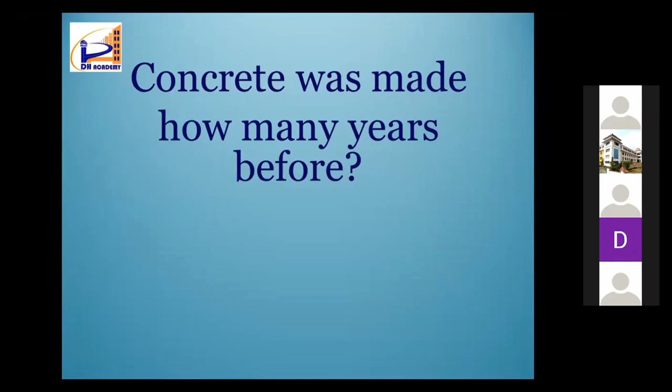Concrete was made how many years before? It's a very interesting question. Generally I get so many answers, but the more appropriate answer is it's more than 9,000 years before. And it is found in many places like Israel, Rome, etc. What I am trying to do here is just like ice breaking.

For 5 minutes, we will be discussing some past structures. You can see some samples of concrete floors which were constructed in 7,000 BC.

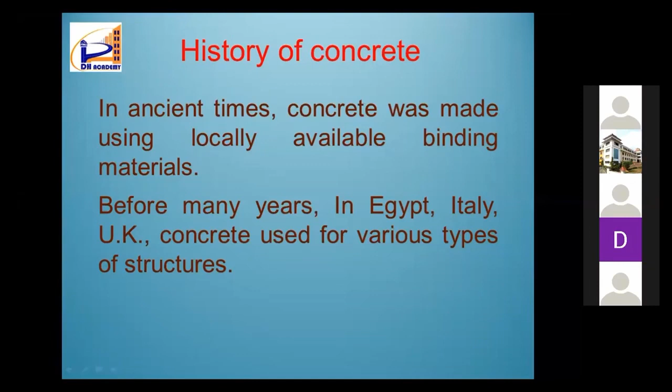Now, history of concrete, as we all know, that concrete was made with locally available material at that time. In India also, there are many old examples. Honestly, those structures, durability-wise, are still surviving and the durability is better. So concrete was made around 9,000 years before.

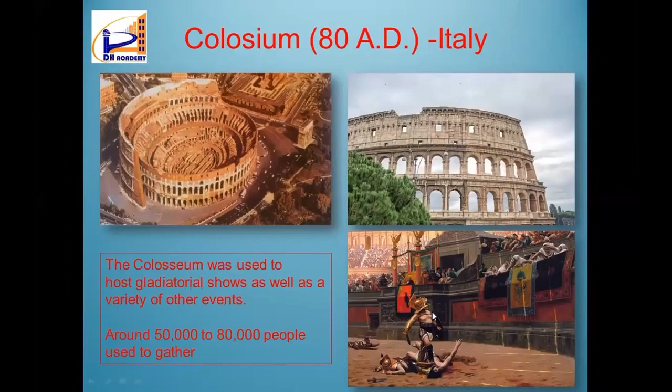Again from Italy, the Colosseum. Colosseum means it's a type of stadium used to host gladiatorial shows as well as a variety of other programs, with a capacity of around 50,000 to 80,000. Now they are actually planning to repair it, but at present it is not working.

And again, it is a tunnel, the Thames tunnel. It is supposed to be the first tunnel built. At that time, the new technology they applied is called tunneling shield technology. You can see a picture from 2010, still there. The year constructed is supposed to be 1843.

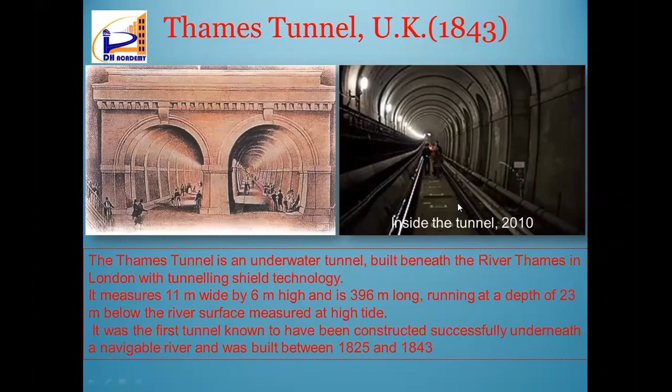And again, from here we all know they are doing some load test. So they are applying a load test, and interestingly, the person sitting inside is the owner, the Hume pipe manufacturer. He wanted to prove that his pipe can withstand a load of 21 metric tons.

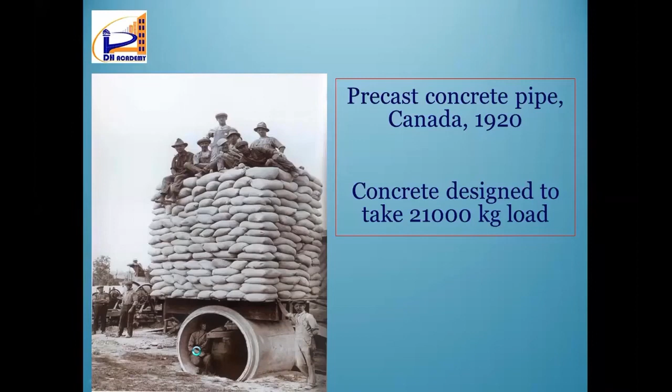Nowadays these Hume pipes are very, very popular, and now Central PWD and all departments allow them. Suppose we are constructing a culvert, we know it's a tedious process, we have to close traffic, everything. Now, if you use this type of Hume pipe, within 2 or 3 days you can construct that culvert. It is now slowly gaining popularity.

And this is also just for fun, I have introduced this slide. Hammurabi was a king of the Mesopotamian civilization. And now we are supposed to follow certain rules, building codes, building rules, everything is there.

So he was the first person who introduced these laws. He used to inscribe them in stones.

The first law: if a building collapses and no one is killed, the builder shall rebuild it without cost to the owner. Okay, that's not a big deal.

The second one, a little more dangerous: if a building collapses and the owner is killed, the builder shall lose his life.

The third one is very critical and dangerous: if a building collapses and the wife of the owner is killed, the builder shall supply him with a wife of similar value.

So this was the first law, and I have taken this from a presentation of Dr. Ramakrishnan, and there are so many other laws also.

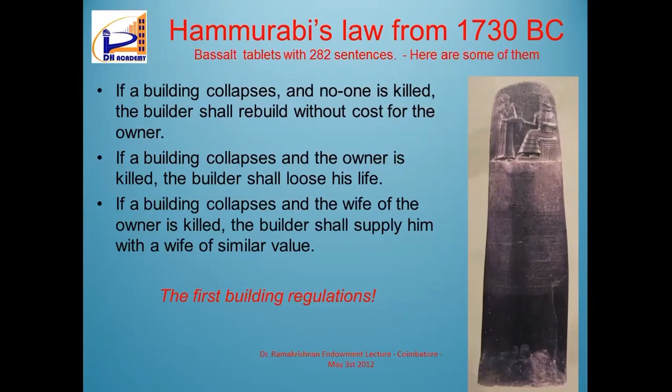Now coming to our situation, as we all know, the most consumed item in the world is water. Next to water by weight is concrete. Concrete is a man-made material, and it is in the number 2 position.

So there are so many advantages for concrete, but we are not going into details of that. If something has to reach second position, it has to have some very good properties or advantages. So let us examine why concrete reaches there - the advantages of concrete.

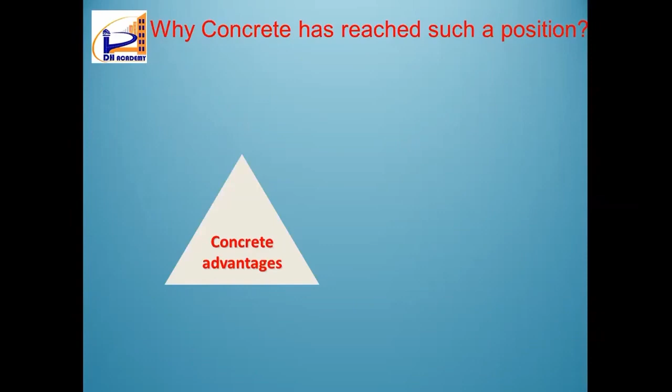Nowadays so many presentations are going on about sustainability. In sustainability there are mainly 3 pillars: economic aspects, environmental aspects, and social aspects. If we have a balance between these three, then we can call it a sustainable structure. Concrete, cost-wise, compared to all other construction materials, is the cheapest.

Then durability - if designed properly, concrete is durable, and its service life can be increased. But because of so many reasons, nowadays the average life of our structures - I'm talking about individual houses, not major mega projects - has decreased to maybe around 30 or 40 years maximum, and we have to do regular repairs. So durability is also one of the main advantages of concrete.

Then the other one, aesthetics. Concrete can be molded to any shape - we design the formwork, and over that formwork we place concrete. So it can be molded to any shape without any additional wastage.

Suppose you want to make an arch with wood - very expensive. If you want a teak wood arch without joints, you have to cut that much wood and take out the arch portion, and the rest will be waste. But in case of concrete, we design the formwork and place concrete over it, so there is no wastage for concrete at all.

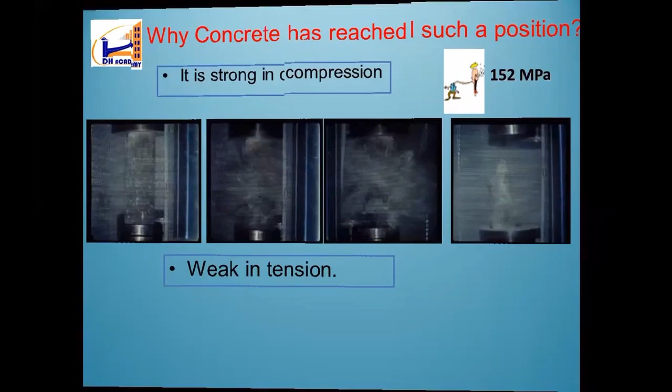Next, concrete will gain strength with time. And this is a very interesting slide, which I think most of the participants, being students, will find very useful, because I'm comparing concrete here.

When concrete is at 20% strength, it's like a baby 1 or 2 years old. If concrete reaches 70% growth, what happens? Without any support, the baby can stand. That means the concrete can withstand itself.

So of course somebody is asking you, when can I do my de-shuttering? You can immediately answer that when your concrete reaches 70% of its strength, then you can remove the shuttering, and it can withstand its self load.

And on attaining 100% strength, what is happening? Concrete can take additional loads also.

Now, another interesting question, mostly for students: why are we considering 28 days for compressive strength? What is the specialty of the 28th day? Actually, 28-day concrete is supposed to reach around 95 to 99% of its strength. That is the reason why it is taken as 28-day strength.

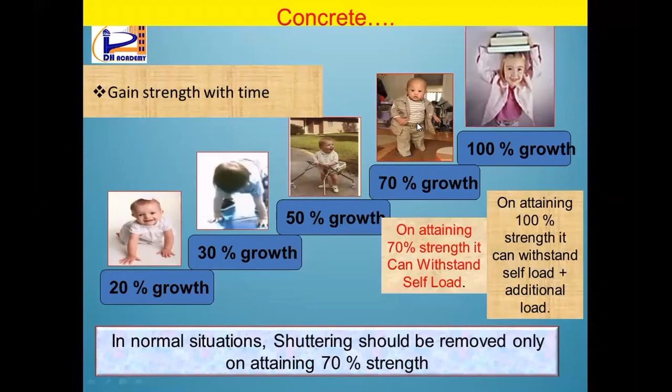Now, concrete can be a durable, environment-friendly material, and you can build some interesting structures. If somebody asks you about the tallest building, you can say Burj Dubai, which is plus 800 meters. Taipei is plus 509 meters, and Petronas Tower is 450 meters. And even some offshore structures go to minus 350 meters.

Can you imagine any other material being constructed below the sea level, at minus 350 meters? It is very difficult, and practically not possible at all. But with concrete, we can achieve that.

And one more interesting thing: the tallest residential building in the world—I'm underlining residential building—is coming up in India. The name of that building is World One. It is around half a kilometer, around 450 to 500 meters high, and it is purely residential. Right now around 60 to 70% of the work is over. Once World One is completed, that building will be the tallest residential building in the world.

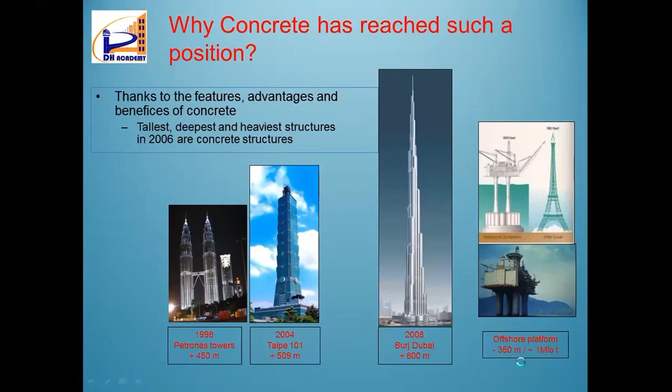Now, we discussed so many advantages of concrete, but concrete is not always performing well. Nowadays it's very rare, but maybe 6 or 8 months back, whenever you read the newspaper, you'd see a building collapse, and all of those were RCC buildings. So we talk about the advantages, but the building is not lasting.

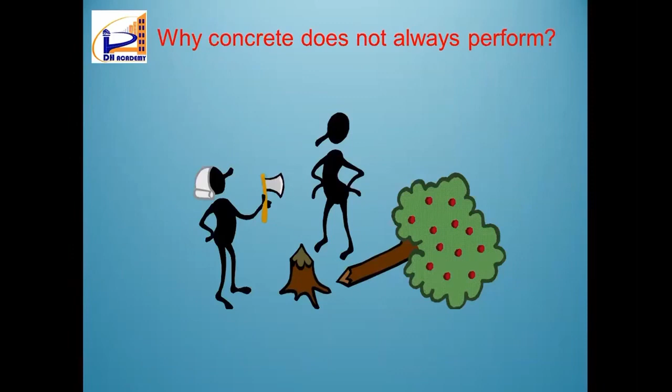So why? There are so many reasons affecting durability. Since we are talking about concrete, we will discuss what concrete contributes to that. Even being the most used universal construction material, concrete is still unknown, and its technology is not well mastered.

For students, I will say we will discuss concrete mix design. So if you ask me whether concrete mix design is a science or an art, I will say it is more towards the art side. I'll give some examples to explain that, because there is a basic science behind it, and the more trials you do, the more information you gain, and you can make good concrete.

That is like practicing Bharatanatyam—it's an art. The more you practice Bharatanatyam, the more you become an expert. So my request will be: theory is theory, but what we have to do is more and more trials.

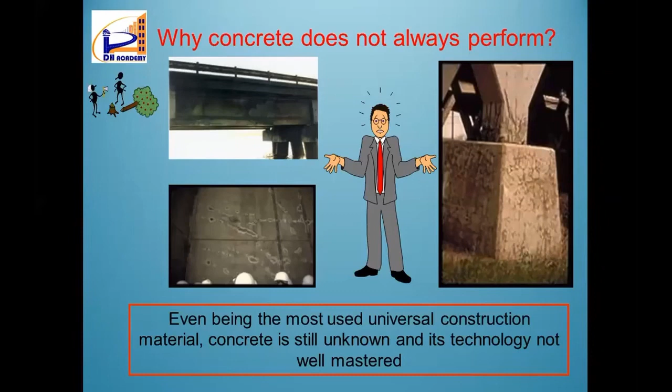Nowadays there is a tendency that we give some materials to someone and ask them to do a mix design. They will just do one trial and give us a mix design. That is actually wrong. We have to have a series of trials and take the average of that. Only that will work, because one time we may get a certain result, but another time a difference in atmospheric conditions will also affect it. So this is very important and key.

Concrete, as I explained, concrete technology is very simple, but many people abuse concrete often out of ignorance. They will say this concrete is not working, this concrete is not good, the durability is not there, cracks are coming, so many problems. According to me, the main villain is that we are not able to control the water cement ratio in the concrete, and we are reluctant to use admixtures—chemical admixtures and mineral components. Basically, chemical admixtures and mineral components are very, very key for making good quality concrete.

And generally there is a tendency—I hope there are some practicing engineers also attending this session.

For them, we are all good people. Those who are not attending this session - some people will not attend the two main stages of concrete, that is placing and curing. Because while placing, if you go near the concrete, our good shirt or pant will get some stains from it. And regarding curing, generally there is a tendency that after finishing, most engineers will say, sir, concrete finished. But for a civil engineer, if we have to say concrete is finished, we have to complete curing also. That is the importance of curing.

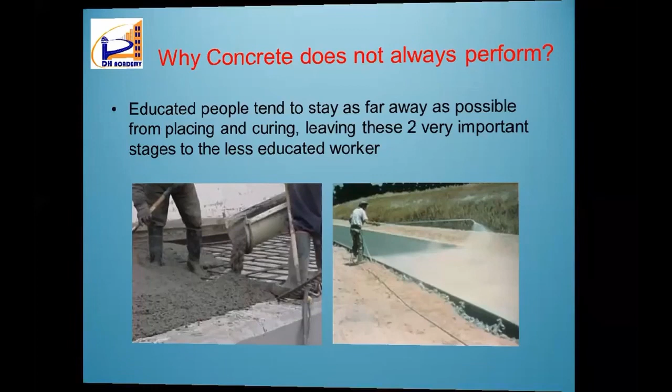So these are some of the reasons why concrete is deteriorating. These are the main reasons. And we have technical know-how available, but the technical know-how used by us is very less. It is in books, it's in theory. We are not ready to apply it.

One example is the usage of chemical and mineral admixtures. Some government departments are still specifying ordinary Portland cement. If you consider the durability aspect of concrete - last time at the ICI Cochin chapter program, Dr. Manu Santhanam from IIT Madras was telling us that blended cement is good from a durability point of view. So we are not applying that part.

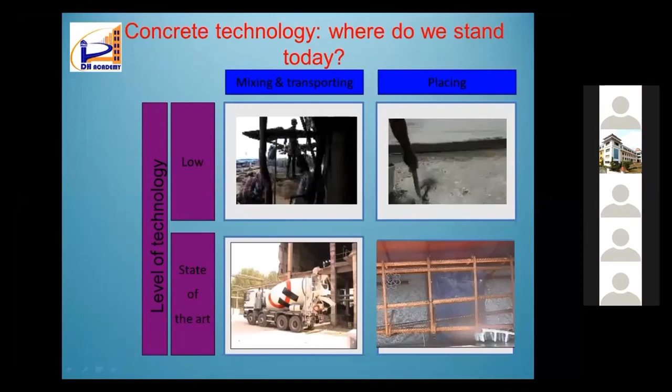Now, latest - you can see the state of art mixing. We have batching plants, we have very good batching plants, very controlled concrete we will get. And in placing, now this is a concrete - this is self compacting concrete happening. You see concrete is just pouring, flowing like water. It is not because of additional amount of water, it is because of the special design and presence of some special admixtures like PCE based admixtures. So we have state of the art technology, but we have very low level of technology being applied now.

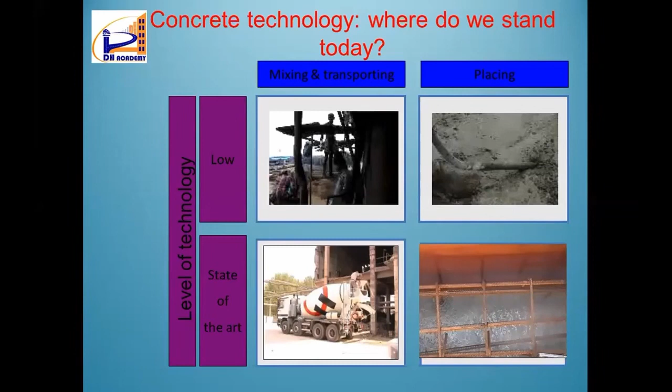So these are the gaps. This is the reason why our concrete is not always performing, though it has got enough good qualities. Sometimes people are not making it in a proper way. So in the present concrete scenario, what I am trying to give you is some information about the do's and don'ts, the wrong practices and the new practices. I told you it's a very lengthy topic - if we want to cover that, I require a minimum of 3 hours. So I am trying to compress it.

Now, the main idea of this discussion - if somebody can suggest something after this session - the question is, could we make a new generation of concrete structures which would be much stronger and much more durable? Can we make that concrete? That is the question in front of us.

Arogyam means no rogam, a state without disease. But suppose I don't have any diseases right now, but by birth I don't have my right hand - will you call me a healthy man? No. So there are two parts to call a person healthy: number one, no diseases; number two, all the organs should be there, in correct position and in working condition. Otherwise we will not call him a healthy person.

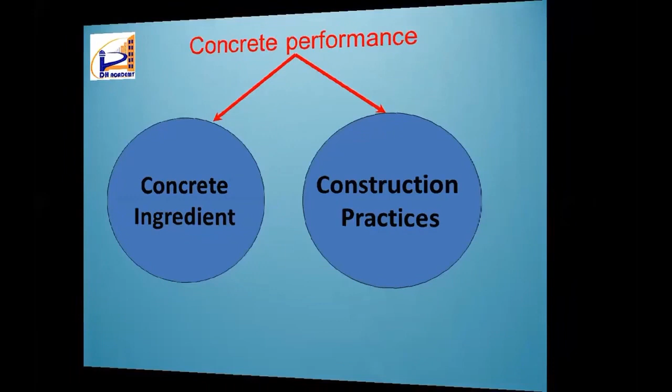Now, concrete is actually a family of materials. It is not like our modern family. In a modern family, what is happening? We are becoming like a nuclear family - me, my wife, and my child, that's only. Earlier the concept was not like that, it was a bigger family, and that is the reason why nowadays the divorce rate is also high. If there is any issue between husband and wife, they directly go to court and file, and the court may or may not allow them to live together - it is up to them.

But earlier, if there was a small issue, they would go to the grandmother or somebody like that. The grandmother would say, 'Your husband only did this much with you? Your grandfather, oh, he did much worse.' So we are happy - okay, she also suffered, I am suffering a little bit, I am happy now. It is just like concrete is also a family of materials.

The difference between a human family and the concrete family is that the concrete family is expanding day by day. Earlier concrete was just cement, aggregates and water - the basic three components. Now mineral admixtures came, chemical admixtures came, and there are combinations of chemical admixtures, combinations of mineral admixtures, combinations of aggregates - all of that came in.

So this concrete family is expanding, and we used to call cement the head of the family because he is holding the family together - that means cement is binding everything. Chemical admixtures are just like the daughter-in-law. We have to select very carefully because it may have compatibility issues with cement, so we have to do a compatibility check before finalizing a chemical admixture.

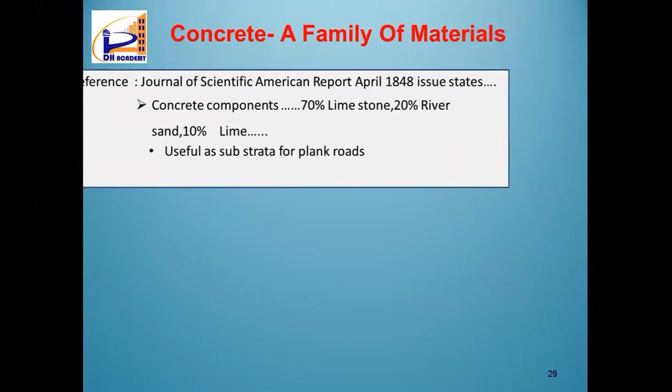So that is the role of water, which is very important and crucial. And as I told you, you can see the family members. Earlier, the concept was in 1848 and all.

Some road work and substrata work used concrete then. The combination was 70% limestone and river sand, etc. Now, modern concrete has so many materials added, and only then are we making our modern concrete.

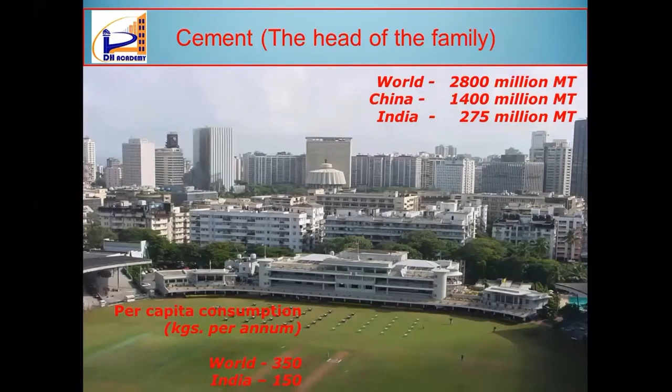Now, as I told, cement is the head of the family. In world statistics, I am not going, since we are a little bit short of time. And cement, I'll just discuss the basic things. Whenever we are discussing with students, we used to ask, who invented cement?

So that was the question. But generally they will tell us the father of cement. So we can say the father of cement is Joseph Aspdin. He invented cement between 1824 and 1828.

Now actually speaking, cement quality has increased, and the basic cement raw materials are calcium oxide, aluminum oxide, silica oxide, iron oxide. So from lime, clay and sand, hematite, we are getting all these materials.

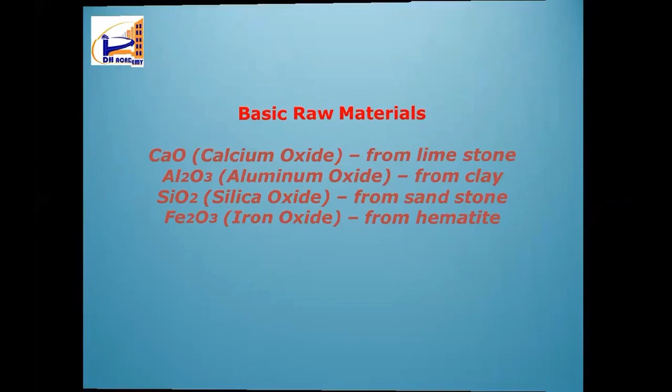Manufacturing process, time is not there, so we are not going into it. And this is called the Bogue components, right? C3S - alite, belite, celite and ferrite. We can say this.

C3S is more in concrete, and it is mainly responsible for early strength and strength at all stages, right? But the problem is higher heat generation.

C2S means belite. It is 15 to 30 percentage. Only at the later stage will it contribute.

C3A, tricalcium aluminate - it is also very less in quantity, but the reaction is very fast. C3A will react very fast, and the heat generated is very, very high. We can say it is the most in concrete after hydration.

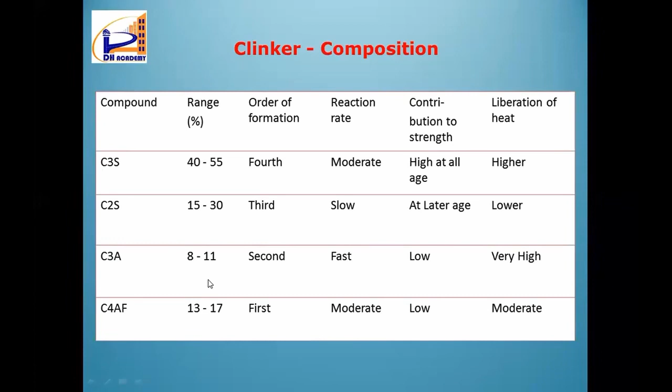And C4AF, tetracalcium aluminoferrite - it is moderate, heat generation is moderate. And because of this tetracalcium aluminoferrite, we are getting cement's gray color, right? Because of the presence of that.

And ordinary Portland cement, now IS code - IS 269, only for this 33, 43 and 53. Then PPC, then slag cement, rapid hardening cement, and there are so many other cements available in the market.

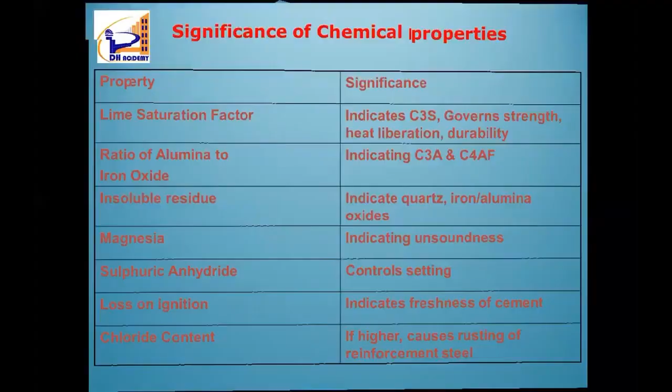Today I'm not going into the details of cement. The reason is quality cements are available in the market, and we are mainly discussing construction practices. And for each property of cement, there is significance also.

Suppose, for me nowadays, I used to get so many calls, and in fact 2-3 webinars also, a panel discussion also organized in this manner, because after lockdown, cement was stored for 1.5 months, 2 months, maybe more than that. So what will happen to that cement? How immediately can we assess whether the stock cement is good or not?

So there are some conventional physical methods. Other than that, what I proposed is this loss on ignition test. It indicates the freshness of cement. It is a very simple test. It will give you very fast results. It indicates whether prehydration has happened or not.

Like that, see how to do this testing - that is not that much relevant. What is the significance of that? That is very, very important.

If somebody is telling you a value, then you have to understand: if the loss on ignition value is very high, maybe more than 5%, then there is an indication that your cement has already started prehydration. So that is not good for construction, we should not use that for construction.

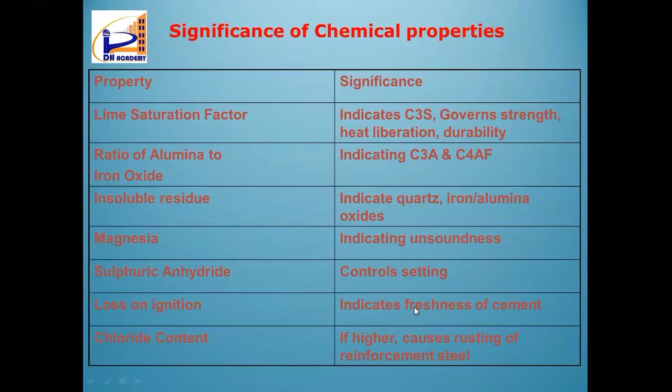But if cement is properly stacked, even for 3 months also no problem, because on the cement bag, as per Bureau of Indian Standard instruction, now one more seal has come, called 'best before 3 months.' It is saying best - we know good, better, best. If you are using it before 3 months, they are saying it is best. They are not saying that after that the cement will die.

So you can have the options. This is the way - suppose you are constructing your own project and you have a 200, 500 bag stock, how will you assess? This is very, very important.

See, we have 3 cement samples, A, B, and C. Suppose all 3 are giving mean strength same. Mean strength means if you take an average of 1 month or 2 months, maybe it is giving around 63 same. But if you see the standard deviation, in case of A the standard deviation is more, B it is less, and C it is very less.

Now for design calculation, we are not directly taking that mean strength value. We are taking the characteristic strength value, that means FCK. FCK is equal to Fm minus T into S. So in case T is 1.65 and S, suppose in case of cement A it is 13, so the characteristic strength is only 41. But in case of cement C, since the value of standard deviation is only 3, we are deducting a small quantity from Fm, so that is the reason why FCK came as 58 megapascal.

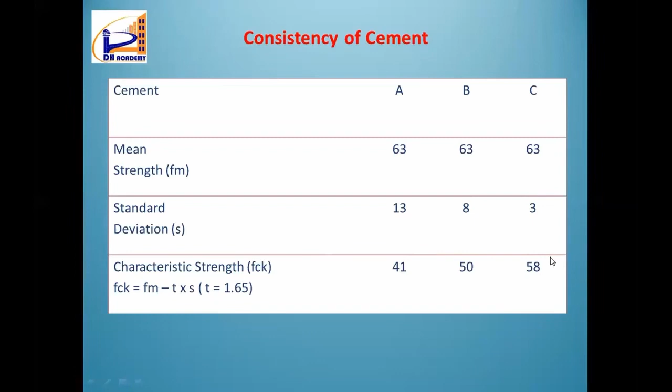So now after your course, whether you are going directly to site or doing some research, whatever it may be, these type of ideas you should have. Average strength and test certificate shows 63 megapascal or 60 megapascal. You have to have a study on the standard deviation of that particular sample also.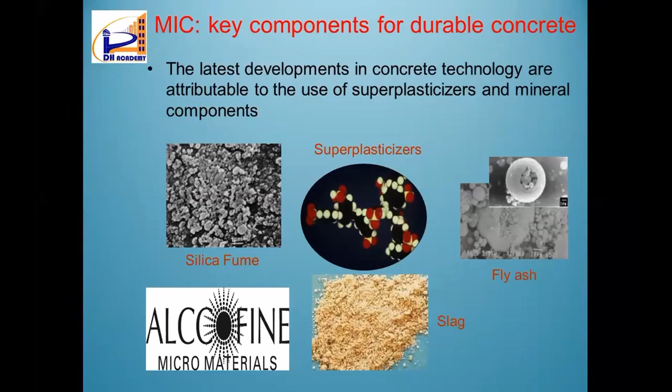Now modern technology, all the benefits of this modern technology attribute to the contribution of super plasticizers and mineral components. What are the mineral components? Mineral components means mineral admixtures or SCMs, supplementary cementitious materials we used to call. There are so many types: fly ash, GGBFS (ground granulated blast furnace slag), silica fume, metakaolin, rice husk ash, and Alccofine. There are so many mineral admixtures, and super plasticizers are also there.

Now I will just tell you one more practical example. Suppose when you visit a very old bus stop or hospital or something like that, you can see the concrete spalling already happened. Concrete is spalled, and in that area you can see the reinforcement corroded. So there are n number of reasons for corrosion of our reinforcement. One of the reasons I am telling you, if you use ordinary Portland cement, please be with me in this slide.

Water will react with OPC. This process we all know is called hydration. The products are hydrated calcium silicates that contribute to strength, and calcium hydroxide or portlandite, which is weak in concrete because of its crystalline structure. This calcium hydroxide, over a period of time, what will happen is if it comes out, that is called leaching of lime. If leaching of lime happens from concrete, that means concrete becomes porous, so moisture will go in and that will attack the reinforcement.

Once that corrosion happens, the reinforcement may expand 1 to 6 times. If our time is bad, it may expand up to 5 times. Just imagine a reinforcement having 8mm dia. If it is expanding 5 times, it becomes 40. Our concrete is very strong in taking compressive loads. Because of the expansion of this reinforcement, certain stresses are induced in concrete, and that stress is called hoop stress. Our poor concrete is weak in taking that stress, so it falls. That is the reason why spalling of concrete happens.

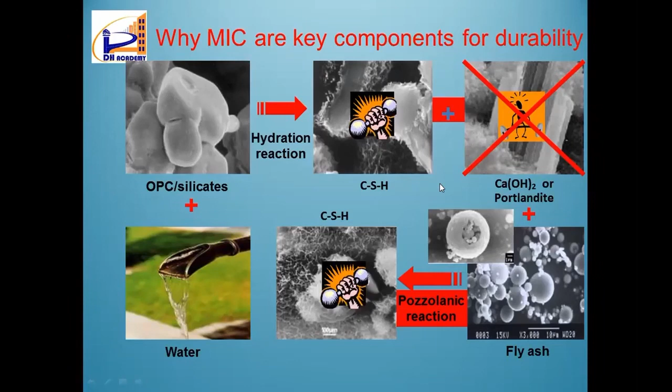And it is especially very good for practicing engineers, as well as students, those who are into concrete, those who are studying concrete technology. So according to me, if you understand this slide very carefully, then so many insights will come from this. I hope you are getting my points.

One more thing is the capillary pore and the time after which capillary pores get blocked. If your water cement ratio is 0.4, generally for individual houses we use a 50 kilo bag, so one bag, 0.4 means 20 liters. If you are adding 20 liters of water, the time at which capillary pores get blocked is 3 days. Within 3 days, capillary pores will get blocked.

The same scenario, now think about 0.5, again comparing with one bag of cement. 0.5 water cement ratio for one bag means 50 into 0.5 equals 25. So if you are adding 25 liters of water for one bag of cement, the capillary pore will get blocked only after 14 days. If you add 30 liters for one bag of cement, then it takes 6 months.

Now, a research student called me about a case. He said, sir, when we cast the concrete slab, everything was okay, curing was fine, there was no leakage. But after 2-3 months, leakage started coming. What could have been the possible reason?

So I said, one reason could be that you might have added more water, and this is in the IS code also. If suppose you are adding 30 liters knowingly or unknowingly, free water - I'm using the word free water, there is a meaning for that - if the free water cement ratio is 0.6, then the capillary pore gets blocked only after 6 months.

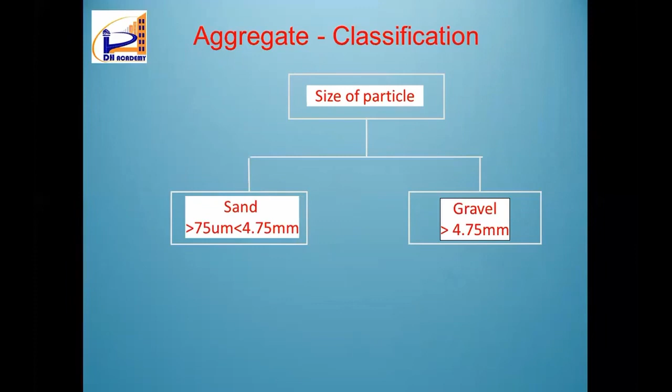Now coming to the aggregate part, I'll be a little fast. We know there are two classifications: one is coarse aggregate, meaning above 4.75 mm sieve, and below 4.75 mm is fine aggregate. As I told, aggregate is 70 to 75% of concrete.

After hardening, concrete has two phases, two parts: one is aggregate, and the other is the cement paste matrix. Cement paste matrix means cement, water, and fines from the fine aggregate - everything mixes together and forms the cement paste matrix. Our coarse aggregate is glued in between that cement paste matrix. That means aggregate is not continuous - the aggregate phase is discrete, and cement paste matrix is continuous.

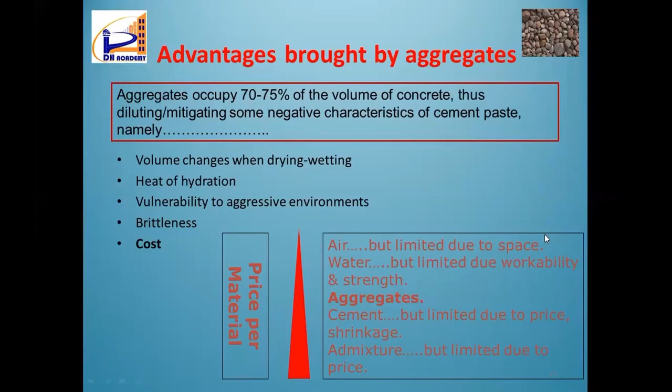So cement paste matrix has so many drawbacks - volume changing, drying shrinkage, heat of hydration, brittleness, cost - everything comes as drawbacks of this cement paste matrix. So by adding 70 to 75% aggregate, we are getting all these benefits. Aggregates mainly give volume stability to our concrete, otherwise drying shrinkage will happen.

Now again, a practical thing - which aggregate shape and surface texture is desirable? If you see, rounded, irregular and angular shapes are actually desirable. Flaky and elongated shapes are less desirable - these type of aggregates we should not use in concrete.

Now, after completion of your course, if you are advising your brother who is constructing a home somewhere around Delhi or Mumbai, you can tell him that you have to use rounded, irregular, angular aggregate - that is what is called science. But from where will he get that? So you should have an idea about the crushers.

If we are getting aggregates from VSI, meaning vertical shaft impactor crushers, generally the shape will be cubical. So that is good for concrete.

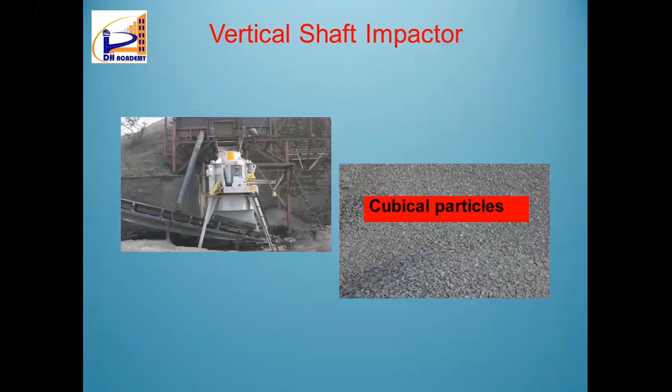If we are getting aggregates from crushers that use jaw crushers, you will definitely get elongated and flaky aggregates. That will lead to poor quality of concrete.

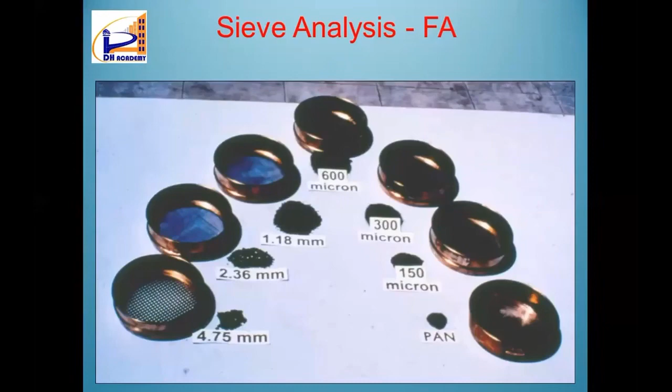So whenever somebody asks you, should I use only 20 mm aggregate for my slab concrete? I'm talking about an individual house builder. You can recommend that he add some portion of 10 mm or 12 mm. Why? Because particle packing will be high.

To demonstrate that, you can ask him to take a 5-liter bucket. In one 5-liter bucket, add only 20 mm aggregate. Don't compact, just level it and take the weight, let it be X. In the second case, use 20 mm and 10 mm, maybe in a 50-50 ratio, or maybe 60-40.

Mix it thoroughly and fill the 5-liter bucket without compaction, then level it. Take the weight, let it be Y.

We all know Y will be greater than X. Why? Because the pores or gaps present in the case of 20 mm aggregate get filled by the 10 mm particles. This is called particle size distribution, and it is also a key factor.

Now coming to sieve analysis. Whenever you get a sieve analysis sheet, there are zone 1, zone 2, zone 3, and so on. The 600 micron size is what decides which zone it falls into, because there is no overlap there.

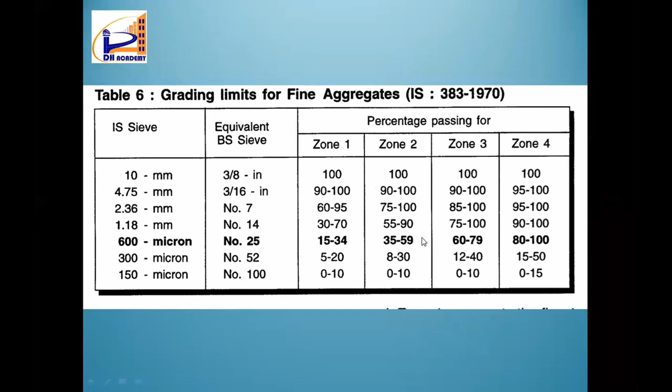For example, 15 to 34, then 35 to 59, then 60 to 79, 80 to 100, like that. There is no overlapping, and that is why it is being used.

Now, one more practical difficulty. In Kerala, around 90% we are using M sand, which is called manufactured sand. But most of the time, we are not actually using manufactured sand, we are using quarry dust instead.

Manufactured sand is defined as a purpose-made crushed fine aggregate produced from a suitable source. Purpose-made means in crushers, they generally take 40 mm, 20 mm, 10 mm aggregates, and the rest they used to call dust.

That dust is not good for our concrete. We have to use manufactured sand instead. Manufactured sand means it is purpose-made — if you add a stone and crush it specifically to take only sand, then it is manufactured. Otherwise, it is only a byproduct.

So this is dust, and most people have a misunderstanding between M sand and crusher dust. Both may come from the same source, but they differ. This crusher dust does not at all conform to IS 383, so we are not supposed to use it.

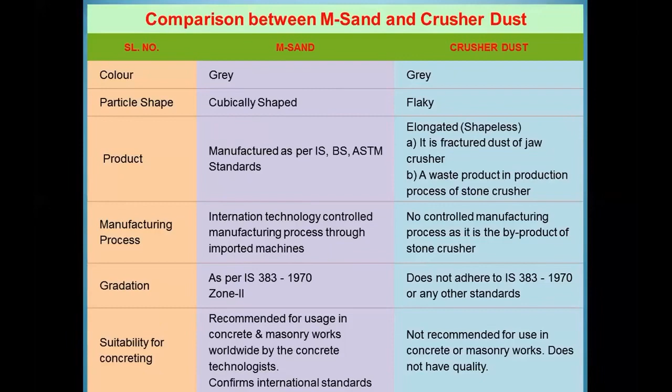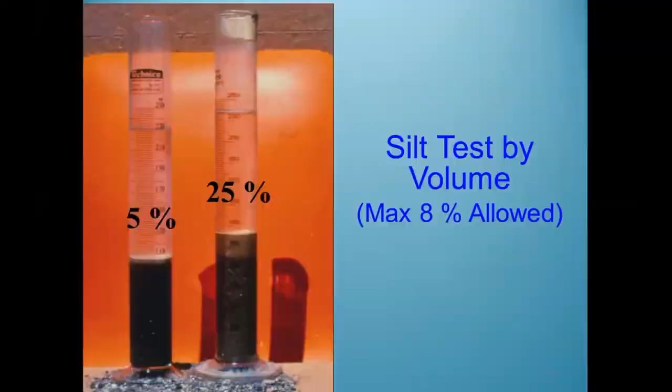And this is not happening in our case. Generally in river sand, silt will be present, and the silt content should be a maximum of 8%. That is theory. So suppose if you are getting an aggregate, the basic fundamental of mix design is doing the design with locally available materials.

So suppose if there is some portion of silt in that, being an engineer, you have to do a washing. You can see here the washed water is coming along with the silt.

So that is just a simple practical application. And you can see after washing, all these things are removed, because it is undesirable in concrete. So it is being removed, right?

Now, use of chemical admixtures, we call it daughter-in-law. So we told that it is very essential to check the compatibility with cement. If it is not compatible with cement, then proper results will not be obtained.

So the main purpose of adding admixture is to get workability. The main advantage is we'll get good workability, and if you get good workability, in some cases we can also reduce the water content.

If you reduce the water content, then by Abrams' law, you will get more strength.

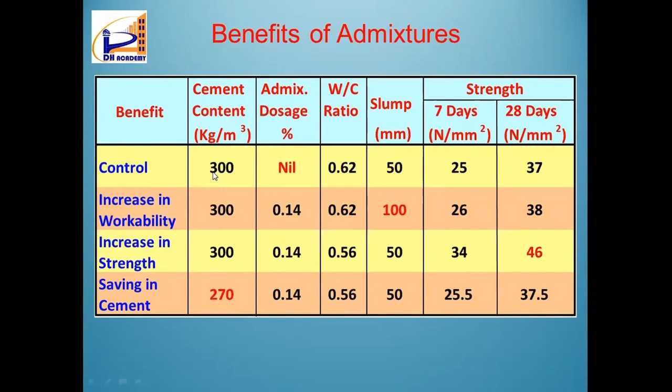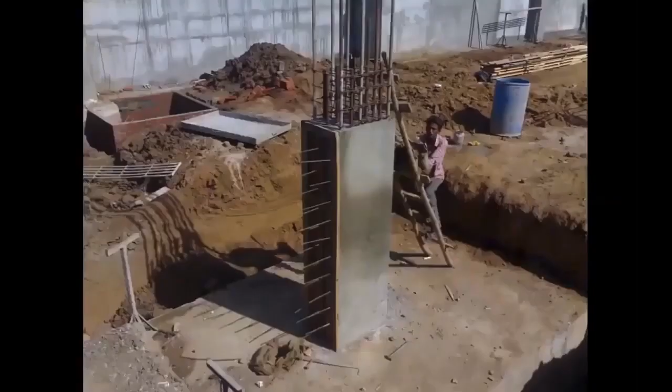So this is an illustrative example, and I'm not going into detail, I'm just touching upon it because time is short. If you use chemical admixture without proper quality control, or without controlling the dosage, some problem will come — some area will not set.

You can see this area is not set.

Now let us go through quickly the correct steps in concrete making. Concrete making will start from batching, mixing, transporting, compacting, finishing, and curing.

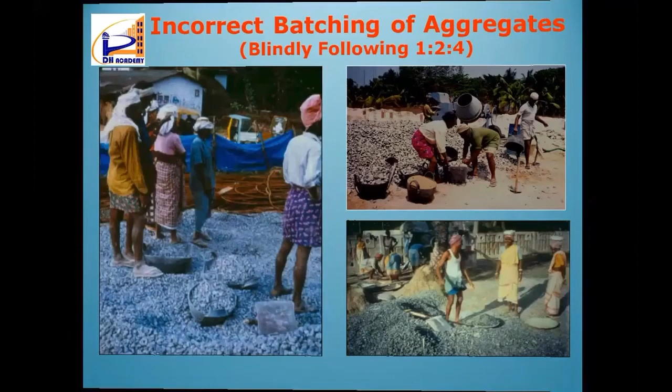Batching, as I told you, means all materials. We are making a chicken biryani, so all the ingredients have to be in correct proportion. That is simply what is called batching. But still, the most popular method is just using the conventional volumetric method, that is 1:2:4, 1:1.5:3. Now we are not supposed to use M15 concrete for RCC work, minimum is M20. But the actual way is to do it with a mix design. Application of mix design is the best way.

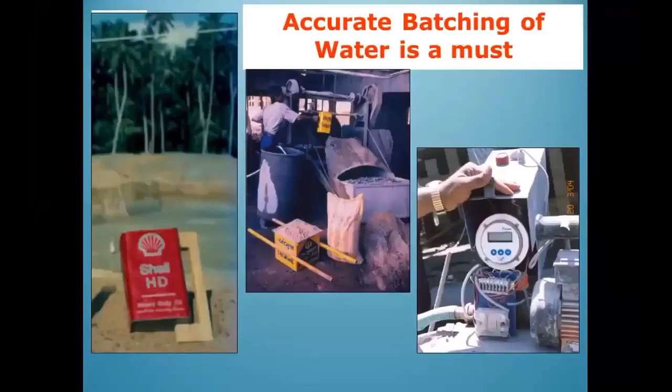But if you have a mix design, then from site, the problem is that we are not having a weight balance. How can we take the weight? That is one concern. Now, if you have boxes - this is also a designed box - you can convert any mix design which is in weight to volume, so that they can implement it at site very easily. Controlled batching is very important. So nowadays, batching plants have all the control measures available. I'm quickly going to mixing now.

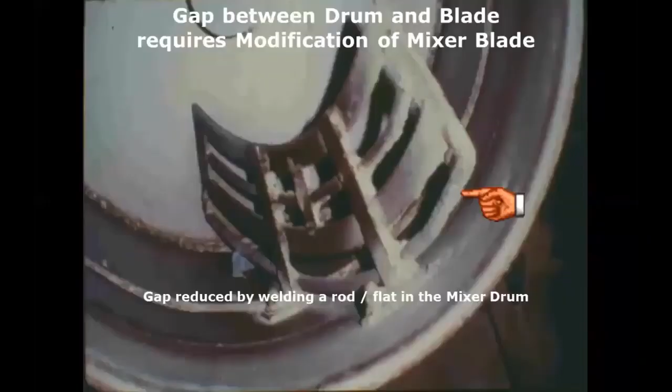There are so many points to be addressed while doing mixing, and the drum capacity - minimum 30% should be empty. Nowadays, as I said in the beginning, we have a conventional method and we have some state of the art for mixing. We have very good machineries available.

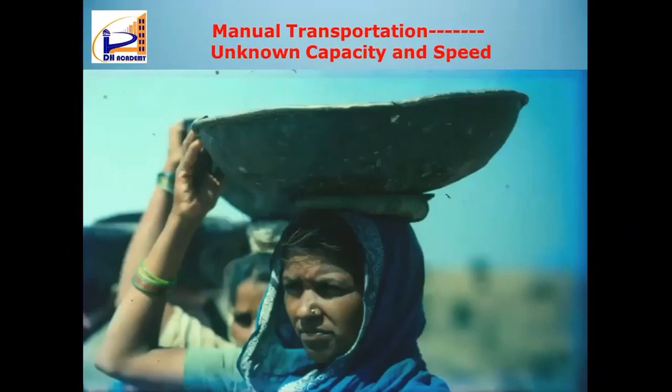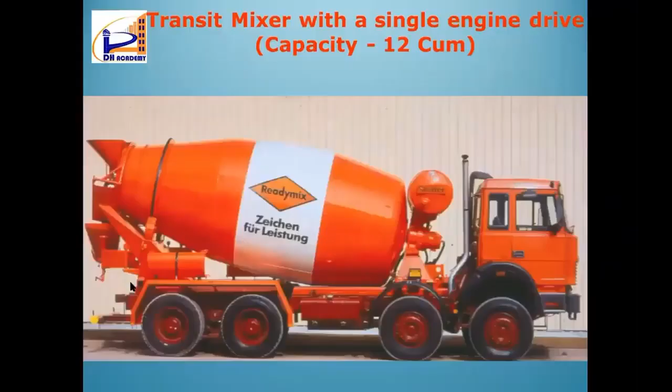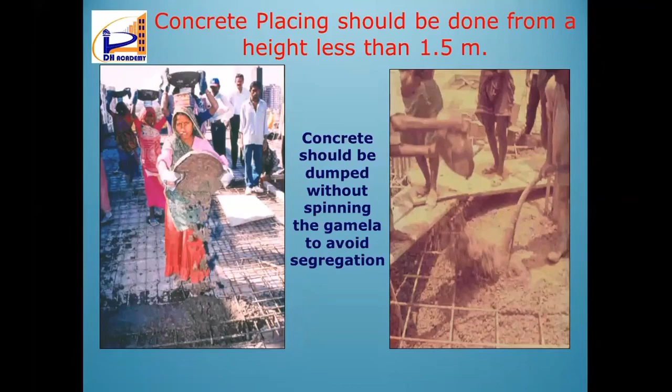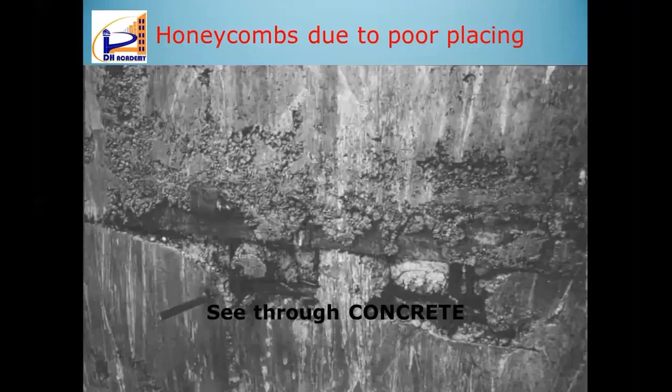Okay, then placing. Placing is also important. We are not supposed to place it above a height of 1.5 meter - that is the maximum height. Otherwise segregation will happen, so we have to be very careful in placing of concrete. If you don't place concrete properly, then sometimes you can make a see-through concrete, meaning if you look at the concrete, you can see the other side, which is actually not a design thing, but a byproduct of improper placing.

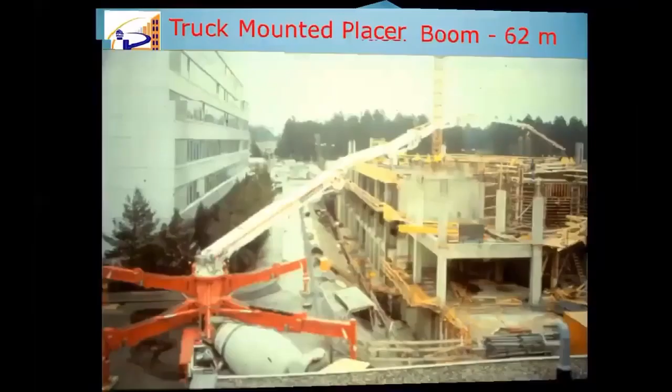Okay, and now a 62-meter boom - you see a boom which can concrete 62 meters away. Where the operator is standing - standing here, he is operating the entire thing. You see, this is the state of the art in placing. These are the developments coming, right? Developments coming means development already happened. So conventional method and new methods also came.

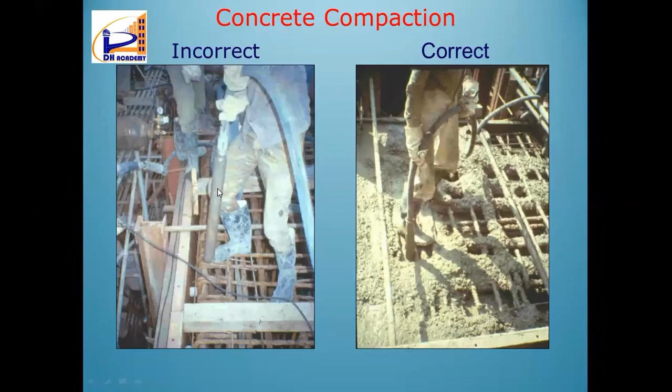This vibrator has to be applied vertically, not horizontally. In most cases, what people are doing is just placing it like a fishing net, throwing it in and pulling it back. That is wrong, and your machine will get damaged.

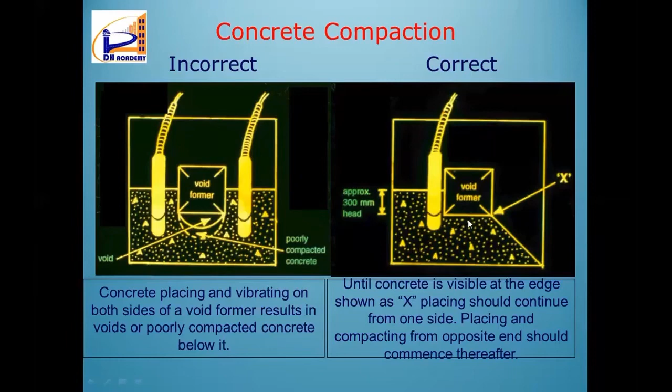If you have a void former or some obstruction, and you are filling concrete on one side, you are not supposed to apply vibration on both sides simultaneously. If you vibrate both sides at once, this portion will have voids. The correct method is to apply vibration on one side and let the concrete become visible through the other side, then start pouring there, so that the void gap can be eliminated. This is one example of that.

Finishing, no need to discuss much, just to get the level right. And for finishing also, there are many methods available.

Now my interesting topic is curing. There are several misconceptions about curing. If I ask why we are doing curing, even some engineers reply that concrete will take some water, and it is good for hydration. Actually, concrete is not supposed to take water. The purpose of curing is simply to avoid the evaporation loss of water from the concrete, because we already added sufficient quantity of water.

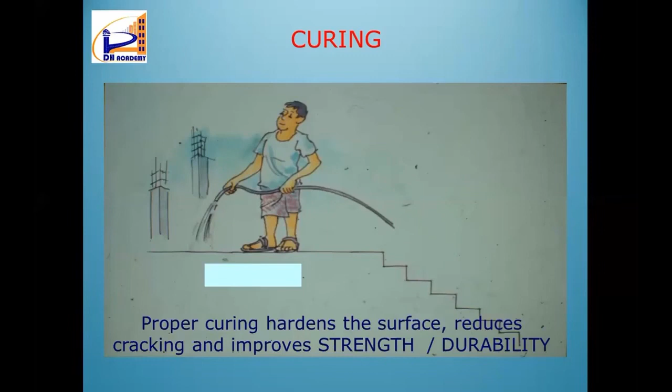For example, for one bag of cement, we add 25 liters, if the water cement ratio is 0.5. For hydration of cement, we need a water cement ratio of 0.25 to 0.3. That means out of that 25 liters, only maybe 12.5 to 15 liters is used for hydration of cement. The rest is for workability. So we have enough water inside our concrete. The concrete should not take additional water. So the purpose of curing is to avoid evaporation loss.

And you can see from this picture, some things were meant to crack. An egg is supposed to crack, otherwise how can the baby come out, or how can we make an omelette? But some things were not meant to crack. Our concrete is not supposed to crack if made properly. We are making concrete not to crack. So that is important, and that is actually what curing is - it's a protection.

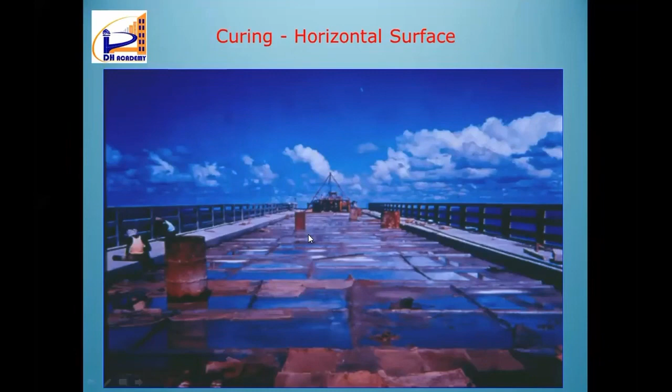See, it is just like applying a fairness cream - it will avoid moisture loss. This is why we are doing watering, so curing. Most of the time, one more question arises: is water a must for curing or not? The answer is water is not at all a must for curing. If you cover the concrete with some plastic sheet, that is enough for curing. No additional water is required.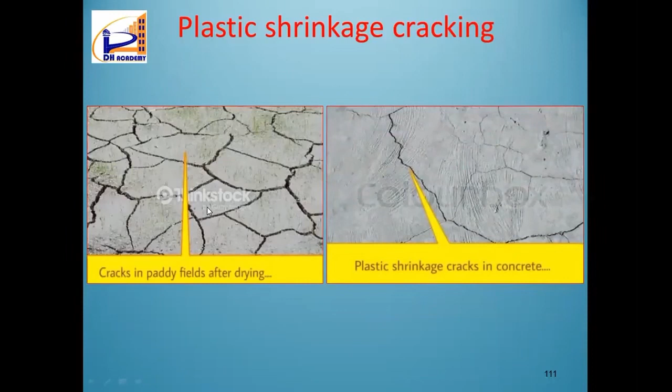And if evaporation happens from the concrete, what is the problem? The problem is plastic shrinkage cracking. You can see the picture - it's a photograph of a paddy field. You can see these cracks. Why did this crack happen? Because earlier there was water, and because of the hot sun, that water evaporated, and that evaporated area turned into cracks. Similarly, plastic shrinkage cracks happen in concrete. The main reason is water evaporation, and that is mentioned in great detail in the IS code.

There are three main villains for plastic shrinkage crack, which is most problematic especially in Kerala and other parts of India where the temperature is high in hot summer. The environmental villains are high ambient temperature, low humidity, and high wind velocity. These are the three environmental conditions which favor evaporation. As per codes, if your evaporation rate is more than 1 kg per meter square per hour, we have to take all precautions in doing concrete, otherwise cracks may happen.

Concrete is just like a fresh baby, so when to start curing is also a very interesting question. In this photo, you can see they are doing concreting and they covered it with a plastic sheet immediately after the initial setting. It is just like a newborn baby - if a newborn baby is born, what do we do? We cover the newborn baby.

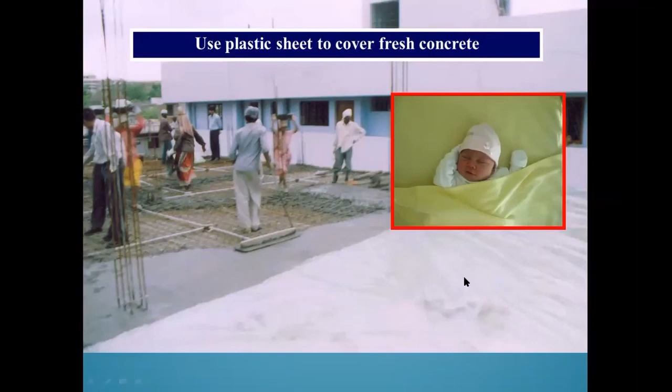We will not leave the cover baby aside for 24 hours or a day. Immediately we have to cure it - concrete is just like a baby, fresh concrete, so we have to cure it very immediately. If we are not following such things, then you see this picture. This is not the innovation which we engineers want. What they have done, maybe some leakage issue or something like that, they made it like a petrol pump - they covered the entire thing with sheet. Solve your problem, add one more roof if the first one leaks. This is not the way which we want.

Now, madam, now it is 11:15. How much time can I take? Sir, it's okay, sir, you can complete it, sir. Can I take 5 more minutes? Okay sir, it's okay. I think our viewers are not getting bored, right? No sir, okay. Now see, I am taking very quickly. I know generally this is not my pace, and because of some unfortunate technical problem happened and all.

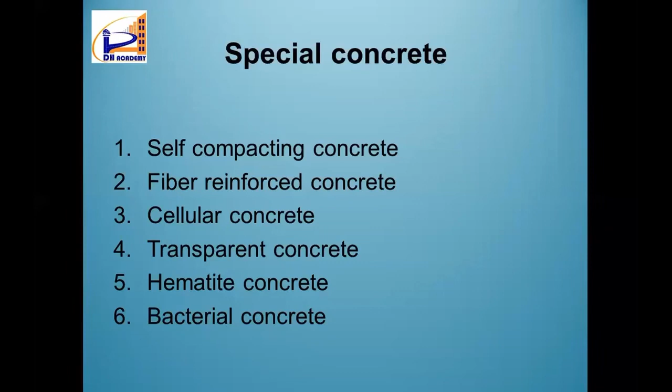Now very quickly I'll take you through some future trends in concrete, some advancements in concrete. There are special concretes - self-compacting concrete, fiber reinforced concrete, cellular concrete, transparent concrete, hematite concrete, bacterial concrete. Now even smoke eating concrete or self cleaning concrete, so on and so forth. These special concretes are coming. My request to all the students is that I'll not say you like concrete, you love concrete, and do some good research which can solve some of the issues. So the purpose of these concretes - some reason was there behind the invention, behind producing such concretes, right?

Now self compacting concrete, as the name suggests, there is no compaction required. We know why we are doing compaction - to remove the entrapped air. Generally in our village areas, suppose we are constructing our individual house, the slab concrete is just like a marriage function - there are so many people over that slab and in the house, biryani and evening and so on. But with self-compacting concrete, no one is required. Concrete itself will flow, and that flow, it will flow like honey. I'm not saying it will flow like water - it will flow like honey.

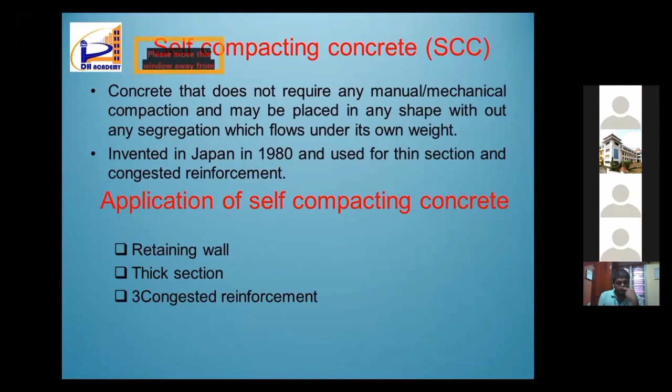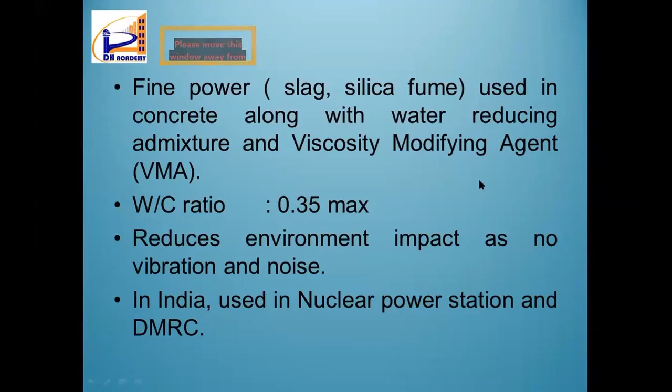There will be a certain thickness for that. The main application is retaining wall, thick sections, congested reinforcement, etc. There is a special mix design, and we are not supposed to use ordinary aggregates - the size of the aggregates are also limited. Water cement ratio maximum is 0.35, and we have to use chemical admixtures that are PCE based. Normally our chemical admixtures available in the market are of two types - one is SNF, sulfonated naphthalene formaldehyde, and the other one is PCE, polycarboxylic ether. These polycarboxylic ether admixtures are very highly water reducing, so that we can control the water cement ratio at this 0.35 maximum, right? And aggregate size below 12.5 is used.

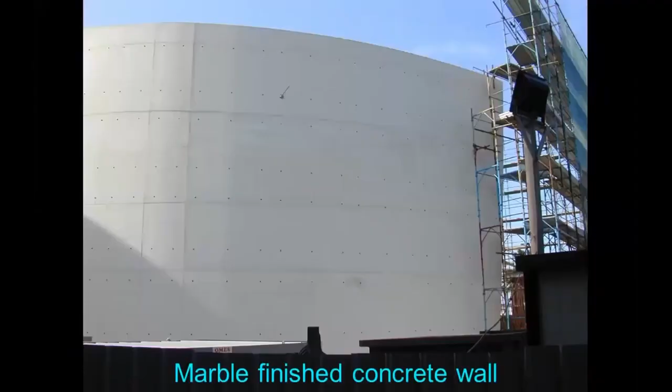Now you see, this is a design - how we will vibrate this, you see. So only option is self-compacting concrete. And as always, we used to say necessity is the mother of invention, right? So for this application, this is how in Japan, self-compacting concrete was developed. And you can see an interesting picture - this is not actually marble, this is concrete, self-compacting concrete.

So the rheology deals with the flow characteristics of concrete. Rheology, that's a vast topic - how to adjust the flow of concrete is called rheology. The rheological characteristics of honey is same as that of the rheological characteristics of our self-compacting concrete.

Now the other one, fiber reinforced concrete. In the beginning we said concrete is very strong in compression and very weak in taking tensile loads. That is the reason why we are adding reinforcement to concrete, and thus we call concrete as RCC, reinforced cement concrete. We also discussed that the approximate value of tensile strength is 10% that of compressive strength. In order to increase that strength, we can add some fibers. You can see in the picture, steel fibers, nylon fibers are added to concrete to increase that tensile value. The application is concrete pavement, industrial floor, bunkers, and some specially protected areas. Even they used to construct compound walls with fiber reinforced concrete.

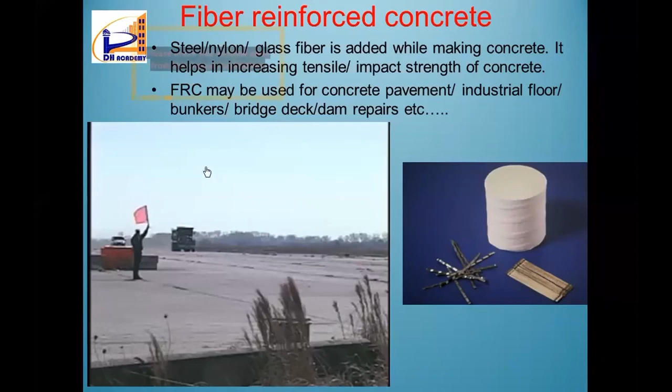I'll show a video. In this video, an explosive loaded truck is coming - don't worry, there is no driver, it is automatically operated. They have constructed a wall with fiber reinforced concrete, and they are just trying to see, if any attack happens, a terrorist attack happens, how the wall will behave.

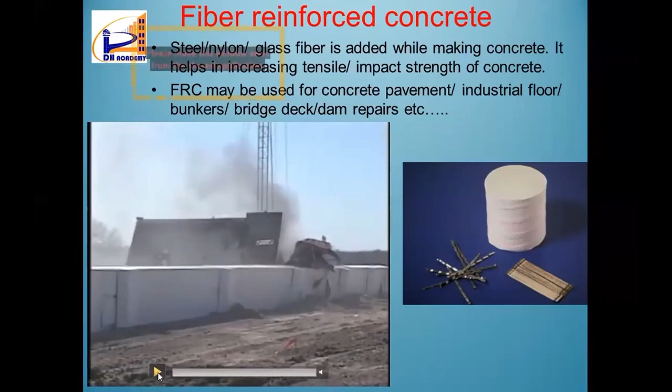So this is a truck loaded with explosives, and they are doing a trial. Just watch. You see what happened to the wall? It just bended and is in the same shape. But if it were pure concrete, what would happen? It would collapse, it would destroy. Let me show you that once again. You see, so this is fiber reinforced concrete.

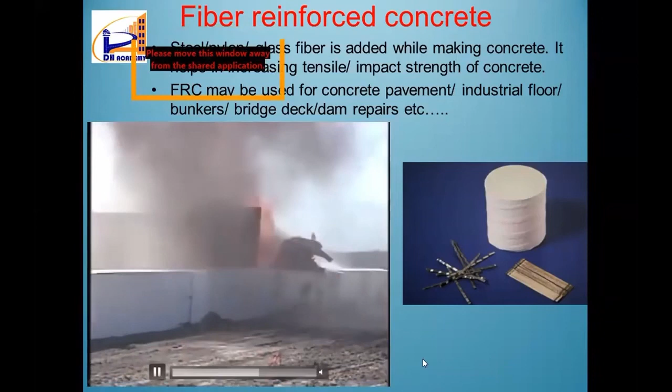Transparent concrete is concrete which transmits light. Some optical fibers are added, and it transmits light, okay.

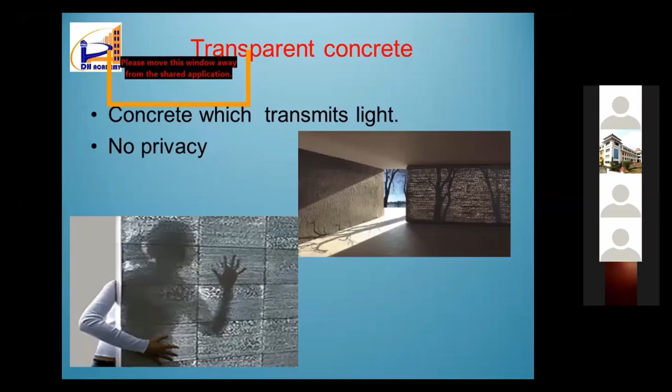And this is just a joke, no privacy. Suppose I am staying on the 5th floor of my building. If my concrete is transparent, how can I sit inside my room? I will lose all my happiness, so no privacy - it's just a joke. You can see it's actually a decorative work, used in some office buildings and such. These are crazy thoughts which people had, and they made it happen. That's why I told you, if you love concrete, do some experiments and find out something new. So this is all about transparent concrete.

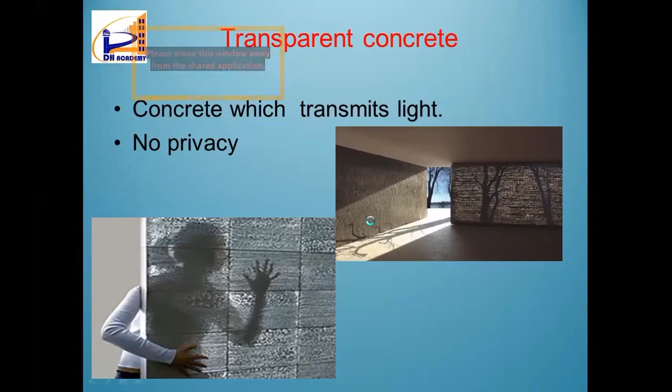Then hematite concrete is just the reverse of cellular concrete. In cellular concrete, the density is only one-third of normal density. Now in hematite concrete, what we are doing is increasing the density of concrete to around 3,000 or 3,200 kg per cubic meter. The main application is in radiation cancer treatment rooms, like cobalt rooms, since the radiation is highly dangerous. So that wall is mainly constructed with hematite concrete. In order to increase the density, they put some iron ore into that concrete.

Now rainy season is coming, and bacteria and viruses are destroying the world right now - COVID-19. In our day-to-day life nowadays, 90% we are hearing COVID-19, COVID-19, COVID-19. Now, with the help of bacteria, Dr. Ramkrishnan made a concrete that is self-healing concrete. That is patented, so we don't know the exact technology, but by using that bacteria, what happens is filling of the pores. So that type of concrete is also happening.

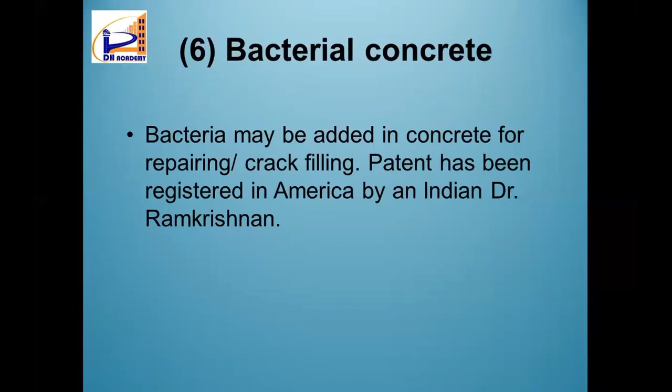And now, one more concrete - smoke eating concrete, or we can call it self-cleaning concrete. Some titanium dioxide is added, and they use white cement for the concreting. Then what happens is the structure stays white all the time. Can you imagine a structure being white all the time? No, because carbon dioxide, carbonation, and all weathering applications cause deterioration to our concrete. But they made it like that by adding titanium dioxide. As I told you, so many researchers are coming up with bacterial concrete, smoke eating concrete, and so on and so forth. So many new concretes are coming. So this is the beauty.